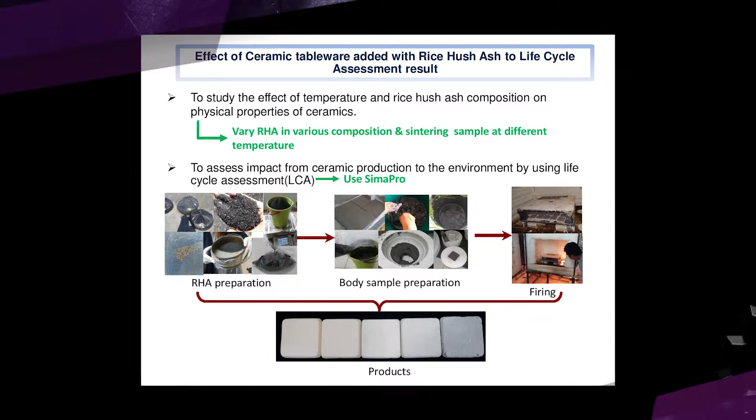Researching the effect of ceramic tableware added with rice husk ash, added to life cycle assessment, which uses an agricultural waste as a substitute material in the manufacturing process of the ceramic. Some papers say that it can improve some properties of the ceramic, like strength.

Every stage of the manufacturing process had a great impact on the environment. Therefore, life cycle assessment must be used to analyze and evaluate the impact of the product. To get the result, I have to do the experiment and create my own ceramic sample.

Firstly, I start by preparing the raw materials like clay and rice husk ash. In this research, rice husk ash was used in various compositions of 0, 5, 10, and 20% by weight. Ceramic samples were then treated at different temperatures of 800, 1000, 1100, and 1200 degrees Celsius.

Three properties considered were water absorption, firing shrinkage, and impact strength, because with different compositions and different temperatures, the results should show different data. For analysis and evaluation of the environmental impact, I employ the SimaPro application program to conduct the assessment.

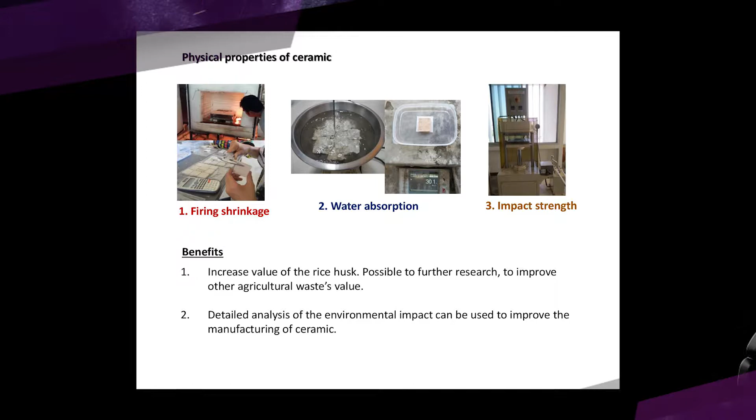The benefits of this research: it can increase the value of rice husk ash, and if we do further research, it can be improved for other agricultural waste, and detailed analysis of the environmental impact can be used to improve the manufacturing process of the ceramic.

Traditionally, we use wet washing method for biodiesel purification, but this method will cause wastewater and contamination. It also affects the environment. For this reason, we will change the wastewater method to an adsorption method by using resin.

So we will study biomass in Thailand, to develop the resin using biomass that is easy to find in the local area, and increase the value of waste peel.

Bioadsorbents were prepared from different peels for adsorption of potassium ion in biodiesel, and the potassium ion value was tested by conductivity meter. The adsorption performance of bioadsorbent was evaluated.

We evaluated potassium ion adsorption in biodiesel at different conditions such as shaking speed, shaking period, exposure time, and the amount of bioadsorbent. We made bioadsorbent from different types of peels: water hyacinth, cattail, and sedge.

From the experiment, we obtained the percentage of potassium absorption by bioadsorbent. The best condition: the first effect was shaking speed of 180 rounds per minute for the bioadsorbent.

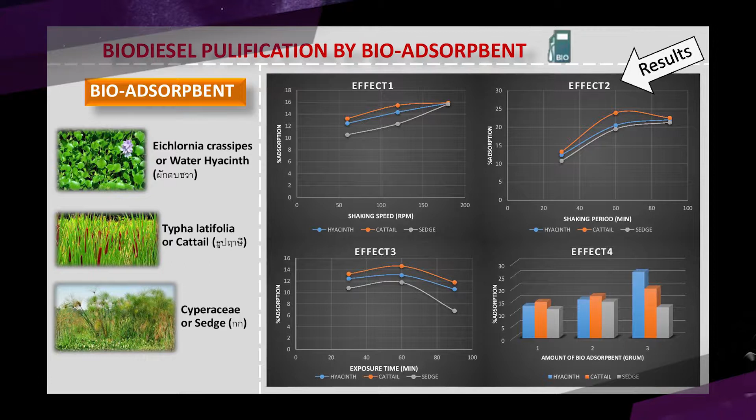For water hyacinth and sedge, we got a shaking period of 90 minutes, and 60 minutes for cattail. Then for exposure time, we got 60 minutes for all bioadsorbents. The last effect: for water hyacinth and cattail, we got an amount of bioadsorbent of 3 grams, and 2 grams for the sedge.

We think the bioadsorbent with highest efficiency is cattail.

Our project is natural rubber encapsulation by spray drying. Our goal is to create natural rubber powder for convenient use with natural polymer. To achieve this goal, we have 2 objectives.

First, to study the effect of encapsulant and spray drying conditions. Second, to study the effect of encapsulated natural rubber on polylactic acid and natural rubber blend. Our experiment can be separated into 3 parts.

First, feed solution preparation: this part mixes natural rubber with encapsulant and dilutes it with water. If the solution is too viscous, we have to decrease the solid content. And if the solution is not homogeneous, we have to add surfactant into it.

The second part is spray drying, where the solution will be turned into powder. If the powder gets stuck within the chamber of the spray dryer...

...we have to increase the air flow rate and air inlet temperature. On the other hand, if the nozzle is clogging, we have to decrease the air inlet temperature and feed inlet temperature. Our last part is testing.

We will test our product based on percent yield, moisture content, particle size, solubility in PLA, and toughness of the PLA mixture. For the result, the best feed...

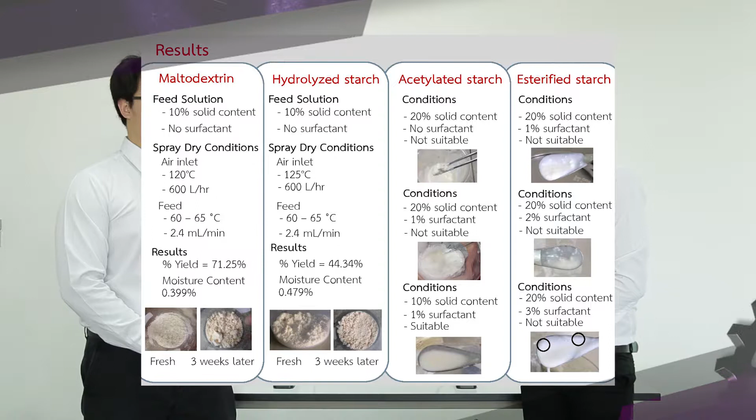...solution for maltodextrin is 10% solid content with no surfactant. Here is our spray dry condition. The result we get from maltodextrin is 71.25% yield with moisture content of 0.399%.

We tested the shelf life by leaving it for 3 weeks. It turned into a yellow color and the coagulate became large. However, if we break it, it's still in powder form.

For hydrolyzed starch, we used the same feed solution as maltodextrin, but changed the spray dry condition, with air inlet temperature to 125 degrees Celsius.

The result we get is lower percent yield with higher moisture content. We left it for 3 weeks and it turned yellow with a small coagulate, but smaller compared to maltodextrin.

For acetylated starch, we used 20% solid content with no surfactant. However, it remained heterogeneous, so we decided to add surfactant, and it formed a viscous liquid, so we decreased the percent solid content down to 10%.

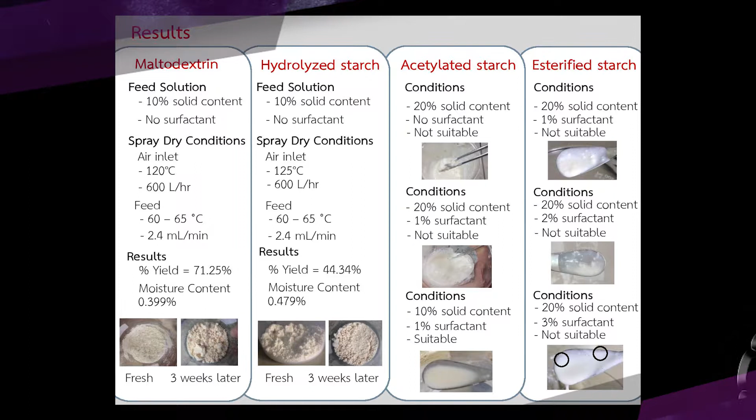However, for esterified starch, no matter how much we add surfactant, it's still in heterogeneous form, so we decided not to use it.

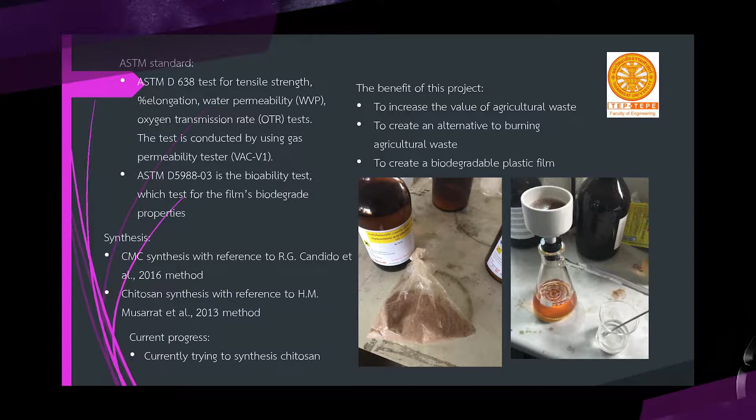Then the film is tested to ASTM standards, the American Society for Testing Materials. There are two objectives to this project. The first objective is to find the effects of chitosan on the composite film's mechanical properties. The second objective is to find the CMC-chitosan composition of the composite film with the least life cycle assessment impact on the environment.

The benefit of this project is to increase the agricultural waste value, and the second benefit is to create an alternative way to deal with agricultural waste other than burning it.

Good morning. Our project is a thermochromic study of FriXion ink in thin film form. A thermochromic system is a system that has the ability to change its color forward and backward due to variation of temperature. In this study, we use FriXion Point erasable ink from Pilot Company.

The colors are black, blue, and red. We apply the ink solution into 3 different types of polymers and cast it into thin film form. Those 3 polymers are natural rubber, polyethylene glycol, and polyvinyl alcohol.

Our study was separated into two parts. In part 1, we studied the reversibility of the thermochromic system by heating up the films at a constant heat rate and recording the temperature of the films and the water inside.

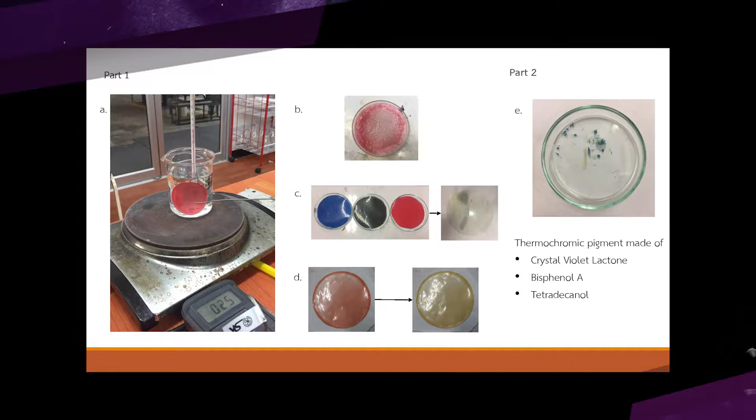So it can be concluded that heating rate is the factor that affects the reversibility of the thermochromic system. For each type of polymer, it has a different limit of heating rate due to the difference in thermal conductivity.

In part 2, we synthesized the thermochromic pigment by using crystal violet lactone as a color former, bisphenol A as a developer, and tetradecanol as a co-solvent. So far, we succeeded in synthesizing the thermochromic pigment, and we are working on turning it into liquid phase so it can be applied with various applications.

Today we present about modification of cellulose acetate and polyamide membrane for desalination. Desalination can be defined as any process that removes salt from water. In Thailand, this process is important for areas that are islands.

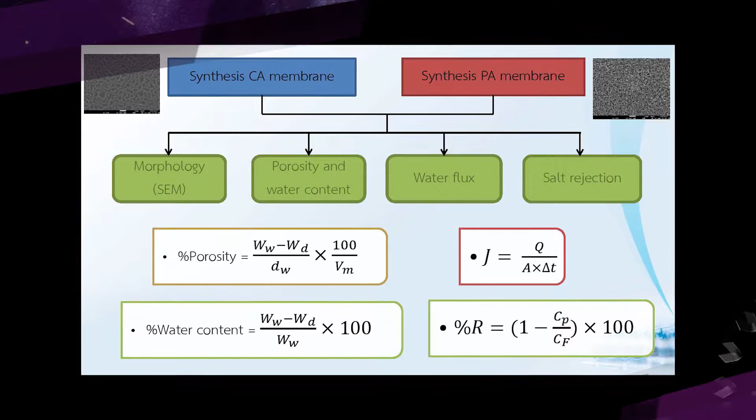We separate into two parts. The first one is synthesis and modification of the cellulose acetate membrane, and the second one is synthesis and modification of the polyamide membrane.

Then we will find out the morphology by using scanning electron microscopy. Next, we will find out porosity and water content, then water flux, and the last one is salt rejection.

Finally, we will compare which one is better between cellulose acetate and polyamide membrane. And we heard that when we add more polyethylene glycol, the characteristic, which one is better, and the water flux and salt rejection will increase.

Our project is the drying of moist municipal solid waste using microwave irradiation. Usually the moist municipal solid waste contains a high amount of water inside, making its disposal via incineration inefficient. We need to use microwave irradiation to remove the moisture content before disposal.

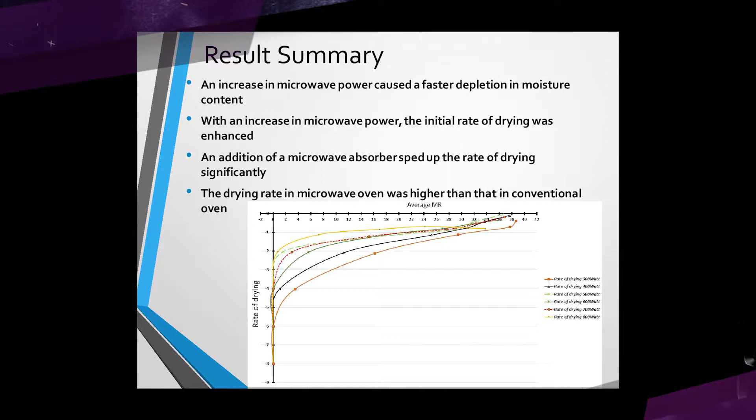So the result summary is that our microwave drying is faster than conventional drying. Also, as the microwave power increases, the drying becomes faster. And after we increase the initial moisture content, the drying time increases. This is the result from the project we have already done.

Our research topic is biomass gasification with PEM fuel cell. The continuing expansion of world population leads to a growing demand for energy, and the rapid growth raises concerns about global warming caused by fossil fuel. Therefore, biomass is one of the potential alternatives to fossil fuel due to its beneficial properties. So biomass is converted into hydrogen by the use of gasification, and the hydrogen is further converted into electricity by the use of a fuel cell.

A fuel cell is a potential electricity system since it can be integrated into many applications. Moreover, the extra energy left from cooling down the temperature from the gasifier into the fuel cell can be converted into electricity by the use of a steam turbine. This study aims to investigate the characteristics of biomass gasification integrated with a PEM fuel cell by simulating the process. The process is accomplished through the ASPEN program in order to propose an alternative solution for the production of electricity.

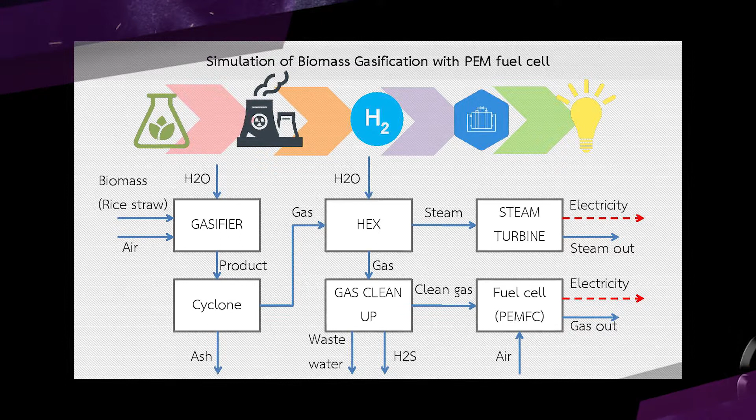The biomass is fed into the gasifier to produce hydrogen. The hydrogen is further sent to the PEM fuel cell to produce electricity. From the result, as the temperature of the gasifier is varied from 400 to 1000 degrees Celsius, the hydrogen output rises until it reaches 600 degrees Celsius, giving the highest amount of hydrogen. Therefore, the best temperature of the gasifier is 600 degrees Celsius for every biomass feed rate.

For the PEM fuel cell part, we set the power output from 1 to 5 kilowatts and operated it at 3 different conditions. First, at 80 degrees Celsius, 1 ATM, and 0% RH. Second, at 100 degrees Celsius, 58% RH, 2 ATM. And lastly, at 120 degrees Celsius, 3 ATM, and 100% RH.

As we can see from the graph, as we increase the operating conditions, the amount of hydrogen required decreases. Therefore, the best condition, or the condition that requires the lowest amount of hydrogen, is at 120 degrees Celsius, 3 ATM, and 100% RH.

Thank you for listening. Today we are going to present our project on release of sodium salicylate from starch-based hydrogel. We synthesized the hydrogel starting with wheat or arrowroot starch, then mixed it with a cross-linking agent such as borax and glutaraldehyde, or mixed the drug first with the sodium salicylate. Then we synthesized the drug-loaded hydrogel and studied the release kinetics of the starch-based hydrogel and its absorbency.

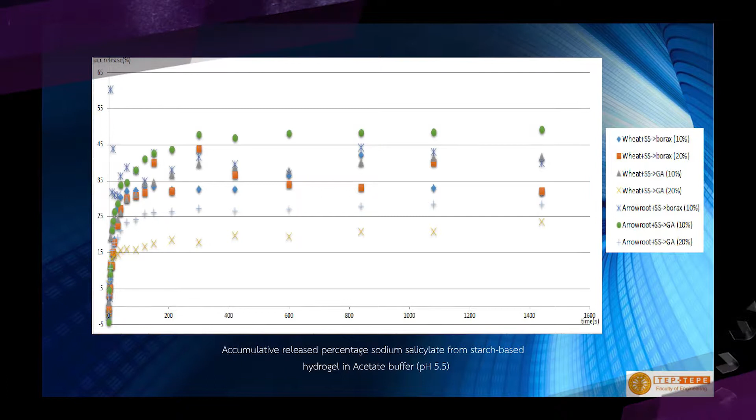This graph shows the accumulated release percentage of sodium salicylate from starch-based hydrogel in acetate buffer pH 5.5. You can see from the graph that arrowroot starch mixed with sodium salicylate and 10% glutaraldehyde gives the highest accumulated release percentage of sodium salicylate. The second one is wheat with sodium salicylate mixed with 10% glutaraldehyde.

You can see from the graph that overall, arrowroot gives a higher accumulative release percentage of sodium salicylate from starch-based hydrogel, with wheat being the second. The cross-linking agent glutaraldehyde gives a higher accumulative release percentage of sodium salicylate from starch-based hydrogel.

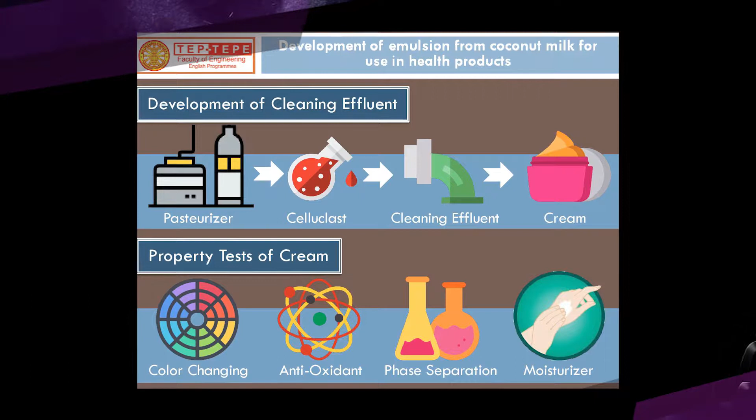Then we discovered that the effluent from enzymatic cleaning has an emulsion property, so coconut oil cannot be separated from the cleaning emulsion. So we apply this enzyme, which we call Celluclast, to develop an emulsion for health products without emulsifier addition. Finally, cream tests such as antioxidant test, stability test, and moisture retention on skin are studied in my project.

Our project topic is the application of a crack detection system in the finite element modeling of cracked concrete structures. I'm going to start with the statement of the problem. Nowadays, many buildings and infrastructures collapse from structural failure. The easiest way to observe structural failure is by the cracks in our building. Therefore, we try to create 3D models with cracks to inspect the strength capacity of the building beforehand, to reduce the risk of collapse in the future.

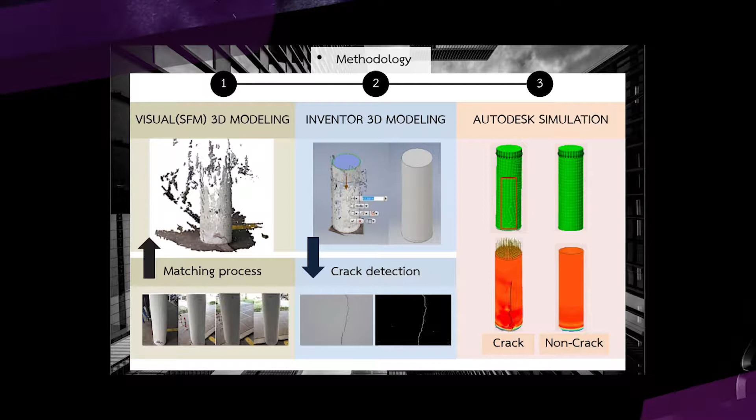To see the total progress in our project, we will go to the methodology, which is divided into 3 parts. The first part is constructing the 3D structure using the VisualSFM application. Before we construct the 3D structure, we have to collect the data set. We photograph the structure from all directions, which becomes a series of images, and then we put the series of images into VisualSFM. This application will create a 3D structure.

After we create the 3D structure, we go to the second step: constructing a 3D solid shape using Autodesk Inventor. Autodesk Inventor converts the 3D structure from the previous step into a 3D solid shape, as real as possible to the original model. Then we try to put the crack detection system into the 3D model. However, because of the limitation of today's technology, we cannot put the crack into the 3D model, so we changed the way, putting the crack in by hand instead of with the crack detection system. After we put the crack manually in the model, we go to the final step.

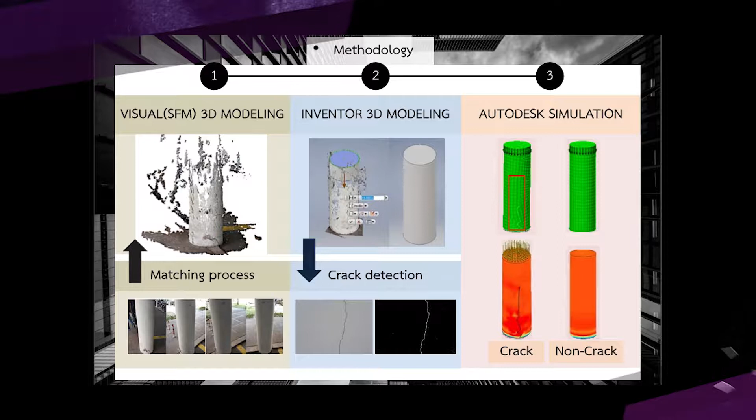The final step is 3D finite element modeling of crack and non-crack structures using the Autodesk Simulation application. This application will analyze displacement, stress, and strain of crack and non-crack structures. After we analyze the stress values, we compare crack and non-crack structures to prove that the cracked structure model has a lower strength capacity than the non-cracked structure. That means the cracked structure has a higher risk of collapse in the future.

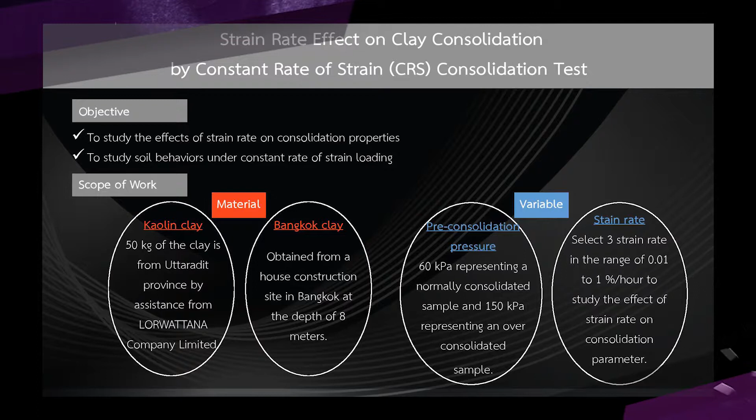For the variables, we decided to study two. The first is the pre-consolidation pressure, varied into two values: 60 kilopascals, representing a normally consolidated clay, and 150 kilopascals, representing an overconsolidated clay. The second variable is the strain rate, varied into three rates: 0.01, 0.5, and 1% per hour.

The methodology for our project can roughly be divided into 4 steps. The first step is to prepare the sample in a 6-inch diameter mold with applied pre-consolidation pressure. The second step is to connect all the devices together, the electronics and the water tubing connections.

The third is to test our subject, which could be subdivided into 2 more steps, which are the saturation step and the consolidation step. And lastly, when we gather all our results, we could analyze and evaluate our results and make a discussion and conclusion.

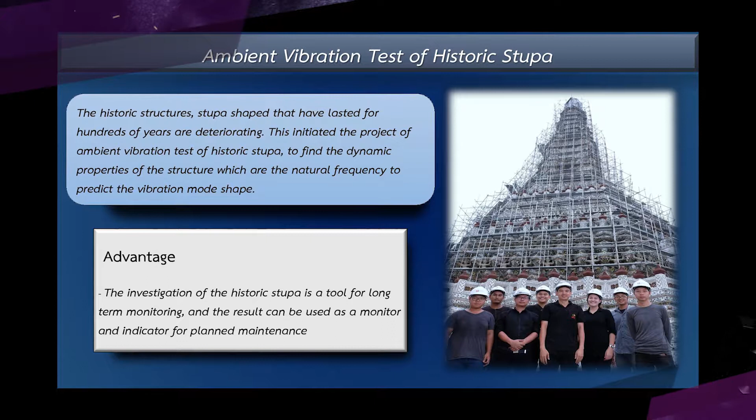The project is ambient vibration test of historic stupa. We consider the historic structures, which are the stupa shape that have lasted for hundreds of years. They are deteriorating, meaning some of them are cracked, tilted, or falling down. Everything is decayed over time, and deterioration is caused by humans themselves and natural events. So if no one has done any research and studies for these historic structures, they will have no evidence for maintenance or any restorations.

So this requires the knowledge of civil engineering studies. This initiated the project of ambient vibration test of historic stupa to find out the dynamic properties of the stupa, which are the natural frequencies, and predict the vibration mode shape. Our main investigation is the central stupa in Wat Arun Rachawararam, Rachawara Mahavihar.

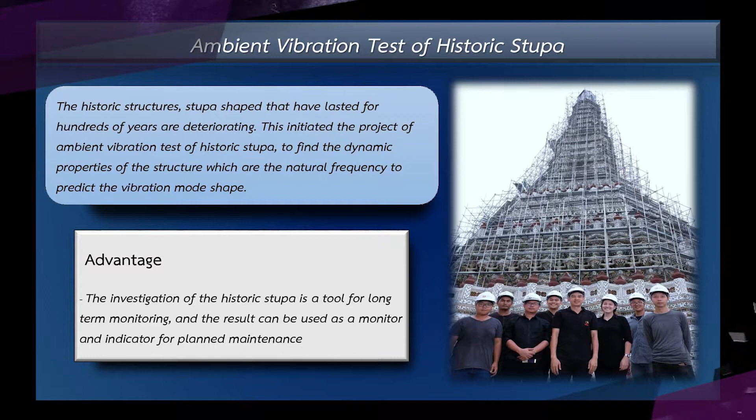For the work procedure, we set up the equipment on top of the stupa, which are the data acquisition system and the microtremor sensor. It records the data in amplitude in time domain. Then we convert it by fast Fourier transform to be the frequency domain. The result shows natural frequencies are likely 3 modes. For the peak one, then we show the vibration mode shape of each stupa.

The results show the vibration mode shape in each direction, which are 3 modes. So this result is useful as a benchmark for the present and compared to any change in the future. This is an indicator and monitoring for planned maintenance. Thank you.

Our research topic is an investigation into construction waste and their root causes. These days, the construction industry in Thailand is growing rapidly. The unavoidable following result is waste. Construction waste in Thailand is a big portion in Bangkok. If we can reduce the construction waste, the waste will be reduced in a huge amount.

Our objective is to determine the major type of waste and investigate their root cause in order to set the measure to minimize them. Our research can save the resources and let the contractor earn more profit and save their cost of production. The construction area and nearby area will become cleaner.

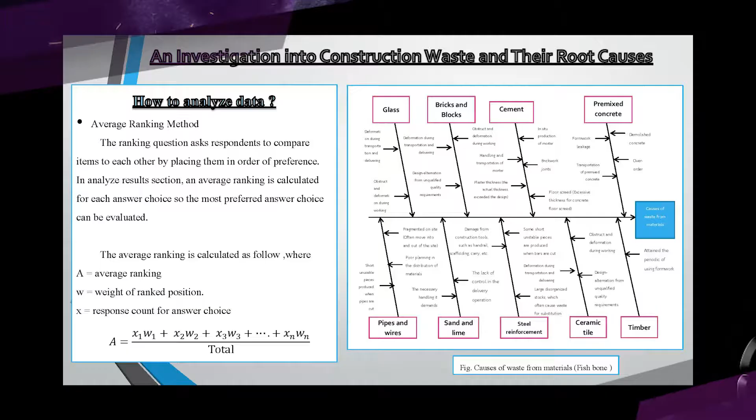As we know, construction waste has been considered as a major problem in the construction industry. We consider that this is the most common problem that we found normally on the construction site. Therefore, we set the minimization to reduce this waste and to control the waste generated from the construction. So, after all, we went through all the research from the past.

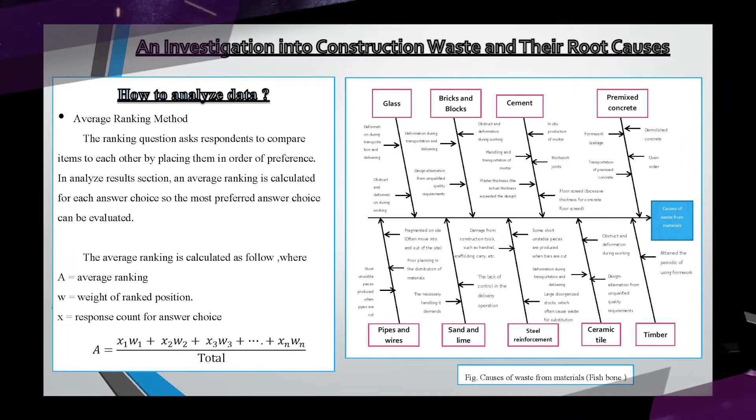We gather the data from this research and make a fishbone to show and illustrate the construction waste in three types. The first one is construction activity that we can also separate further into handling, procurement, design, and operation. The other one is the fishbone from the construction waste from material that we can separate to many types of construction materials such as cement, brick, ceramic tile, or any pre-mixed concrete that we generally found on the construction site.

Therefore, after we gather all this data, we design a questionnaire to hand out to all the professional engineers on the construction site to answer. We will use the ranking method to rank this construction material and construction waste from the most to the least. By using this method, we will know which construction waste will come the most and which one will come the least.

After all, we conclude all the data. We will set the minimization for the construction waste, how to reduce all of them, by making another fishbone to illustrate how to set this construction waste. After we gather our three fishbones, we will conclude all the data, and then we will use it and publish it to the public. Thank you.

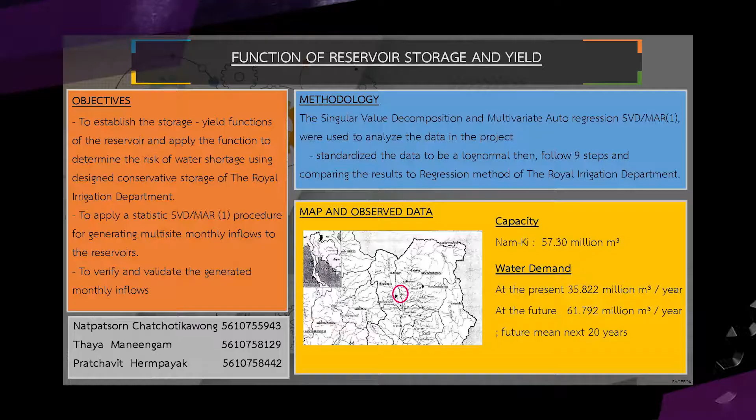Our project is the function of reservoir storage and yield. The purpose of this project is to determine the risk of water shortage using the design conservative storage of the Royal Irrigation Department. Second, to apply the statistics SVD and MAR1 to consider the generated multi-site monthly inflows, and the last, to verify and validate the generated monthly inflows.

The methodology that we use is the singular value decomposition and multivariate auto-regression method. To standardize the data to log normal and then follow the 9 steps, comparing the result with the Royal Irrigation Department.

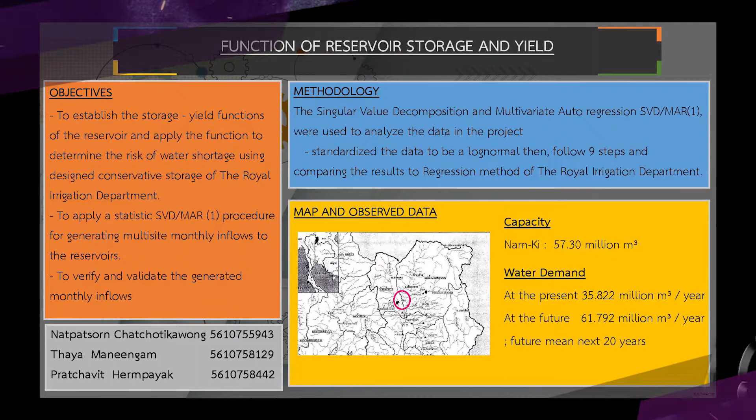The reservoir that we concern is Nam Ki Reservoir. Nam Ki Reservoir is located at Nan, Thailand, and the capacity of this reservoir is 57.3 million cubic meters, and the water demand at the present is 35.82 million cubic meters per year.

From the results of this project, we know that reservoir construction is not needed at present, because nowadays the water demand at Nam Ki Reservoir is just only 35.822 at the present, and for the next 20 years it's just 61.792 million cubic meters per year. But this graph shows that the water demand that needs reservoir construction is above 430 million cubic meters per year.

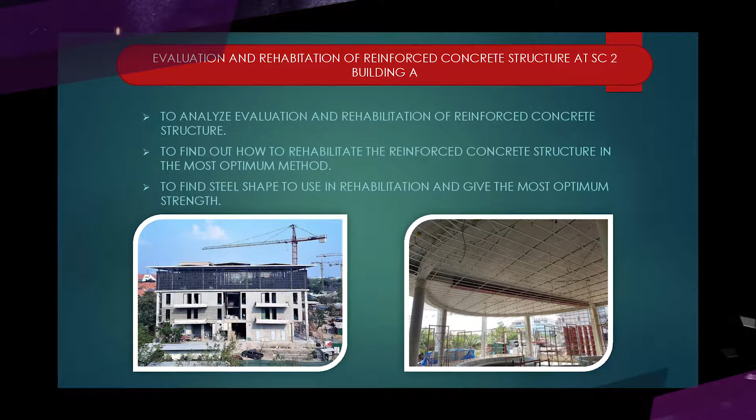Today I'm going to present about evaluation and rehabilitation of reinforced concrete structure at case study SC2 Building A. This building has some problem about under design of the reinforced concrete structure, because when the designer designed this building, they designed the cross section of some beams and columns too small, and some deflection occurred when the construction started. And the main point of our project is rehabilitation of the beam named PL2B8,

which has a problem of cracks occurring because the bending moment is overloaded. This problem occurs when we do not apply any live load. So the deflection of it is more than 5 centimeters and does not pass the ACI standard. So we have to find some way to repair it.

And the method we use to analyze the structure of this building is the finite element method. We used some computer programs to analyze the structure because nowadays we have many programs which can use the finite element method to analyze the structure, and it's easier than calculating by hand.

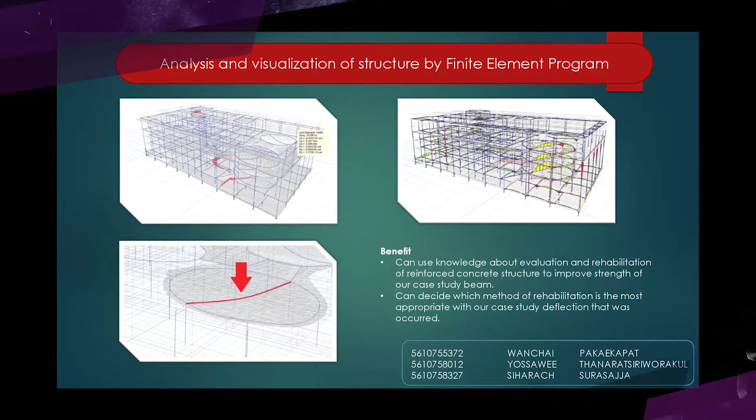And this is some drawing from our programs. It is a 3D drawing program and it can analyze all the information about the structure, like bending moment diagram, shear force diagram, and show all the deflection from load, and can tell us whether the structure can be used in the future or not.

And the result tells us the deflection occurs and it's like in the real situation, because the deflection from the programs is around 5 to 10 centimeters. So we have to add more external reinforcement to repair it.

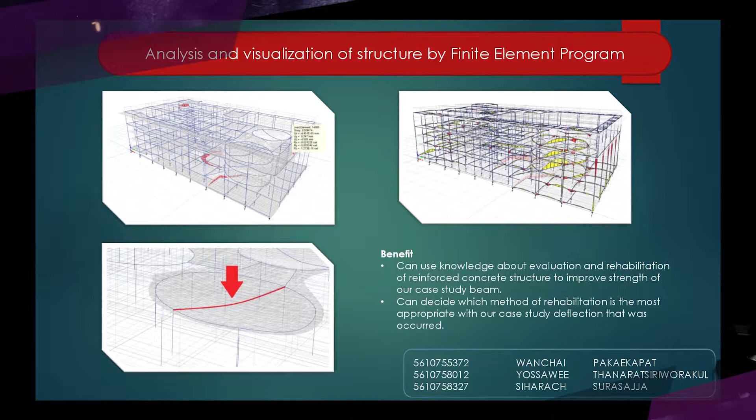So, the result is when we repair the beam, PL2B8 beam, deflection is less than the standard. So we can conclude that our rehabilitation method is good enough to use in the real situation. So this is all about our project.

Thank you. The project is about assessments of defects in high-rise condominiums. Nowadays, there are a lot of people who prefer to live in high-rise condominiums within the city centers more than a single house that is far away. So there are many construction projects in the city center, especially high-rise condominiums. And defects are the main factor that affects the whole construction project.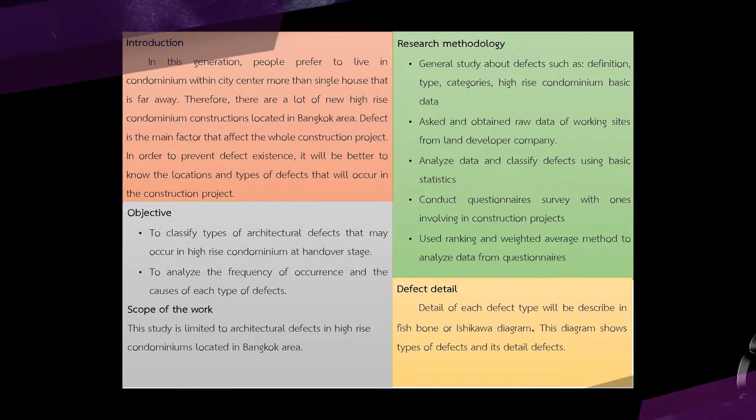Therefore, it will be better to know the location and type of defects to prevent defects in construction projects. The objective of this study is to classify types of architectural defects at handover stage in high-rise condominiums and to analyze the frequencies of occurrence and the causes of the types of defects. The study is limited to architectural defects in high-rise condominiums at handover stage within Bangkok area. Research methodologies divide into 6 main steps.

The first one is general studies about defects, such as definitions, types, and categories. The second is asking raw data from land developer companies. Third, classify and analyze the defect types using basic statistics. Fourth, conduct a questionnaire survey with those involved in construction projects.

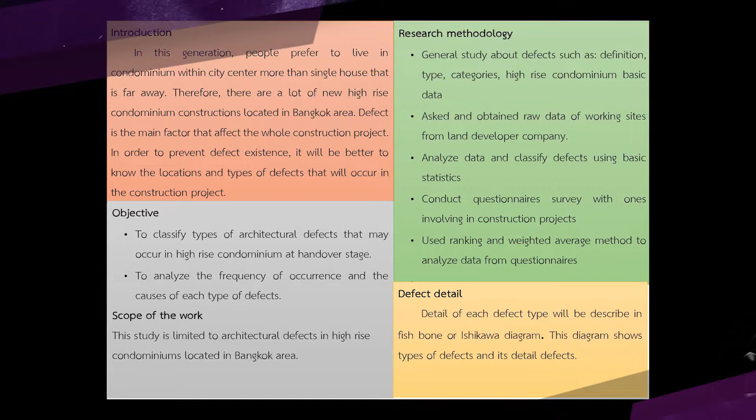Fifth is to analyze the questionnaire survey using ranking method followed by weighted average method to find the real result of the survey. And the last step is to make conclusions and compare the 2 types of data that we got from the land developer companies and from the survey itself. The details of the defects will be shown in a fishbone diagram or Ishikawa diagram, and I will show it later.

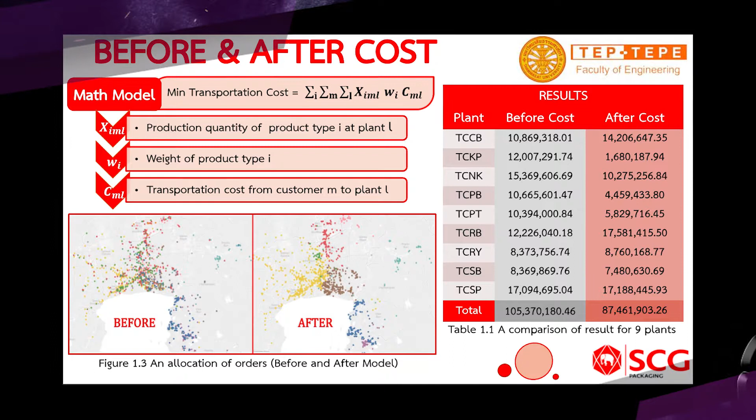Here shows a comparison of delivering costs before and after using our math model. The tables indicate that we can reduce the cost from 105 million baht to 87 million baht, which is around 17% of the cost. And the maps show an allocation of order for the customer, which groups the customer into the zone that the nearest plant is located. It helps the company to deliver the product easier.

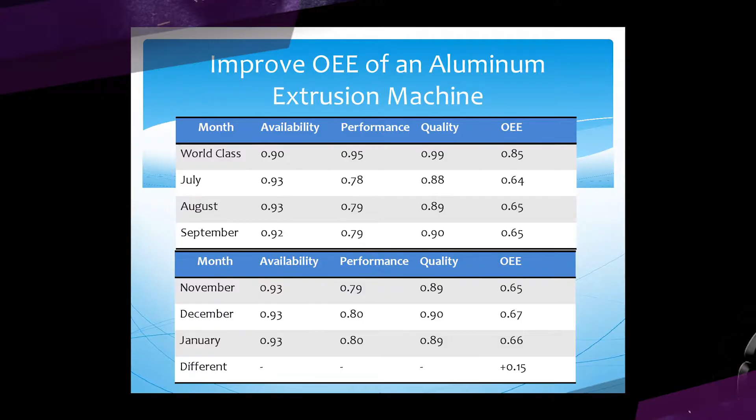The availability here is the base, and we've gone over the availability of the world class. But performance and quality, we are just under them. So we have improvement on these 2. And again, the conclusion is a success of 0.15%. And that's our project. Thank you.

Our project is called Orders Co-Planning and Scheduling for Packaging Factories. SCG Packaging is one of SCG's main business units. It is one of the largest manufacturers of corrugated containers in Southeast Asia. And the objective for our project is to develop the methodology for co-planning and improve order allocation for both plants by minimizing the total cost.

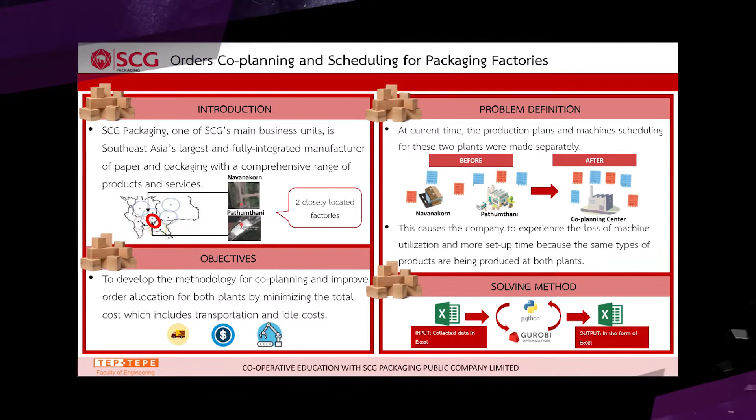And for the problem that we found, at current time, the production planning is made separately since each plant receives the order by itself and schedules the machines by themselves as well. So we will solve this by collecting the data in the form of Excel and then putting it in Python and solving by Gurobi optimization software, and then the output will be in the form of Excel as well.

Next, we are going to discuss our mathematical model. Our aim is to reduce the setup cost, manufacturing cost, and also transportation cost. We also have 6 constraints to limit the production, including demand, machine capacity, paper width, flute, board combination, and also production limit per period.

As you can see from the pie chart, firstly, Pathum Thani has production accounting for 50%, but Navanakorn has only 36%. And both of them can produce the same products, about 14%. And after we use our mathematical model, their production units are shared equally.

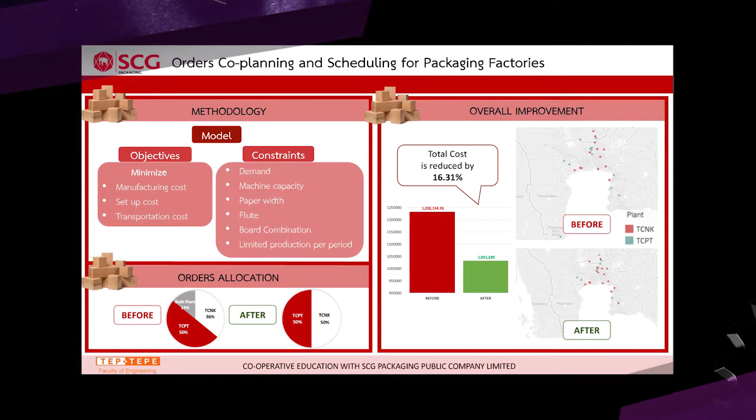And this is the overall improvement. We can reduce the total cost by about 16.31%. And some of the products from Pathum Thani are shared to Navanakorn because Navanakorn has higher machine capacity.

So our project is a stand-up desk. Our objective is to create a stand-up desk that reduces the ergonomic problem for people who sit in front of a computer screen for long periods, and also adapts to install in the real existing workplace. Our stand-up desk uses the mechanic lifting system and adjusts according to sitting and standing height for the correct posture of each individual. Furthermore, it differentiates from existing stand-up desk manufacturers by reducing the cost, maintaining the quality, and being designed to suit the Thai office worker.

So the advantages of the stand-up desk are: first, increase the heart rate. Second, impact the metabolic risk factors. Third, reduce obesity and weight gain. Number 4, increase work performance. And number 5, reduce several diseases.

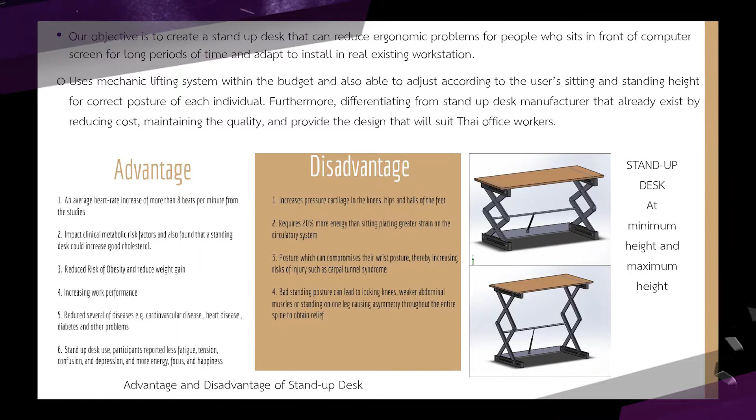So next are the disadvantages of the stand-up desk. First is increased pressure on the knee. Second, it requires 20% more energy. Number 3, increased risk of injury, such as carpal tunnel syndrome. And the last is if you don't have the best posture for standing, it can lead to injury too. And next is the mechanism of the standing desk.

Okay, so for the lifting mechanism of our standing desk, we use what we call the scissor lift, which is the orientation of a single and a double X bar in an X pattern. This allows us to use a shorter gas spring, which means we can reduce more cost.

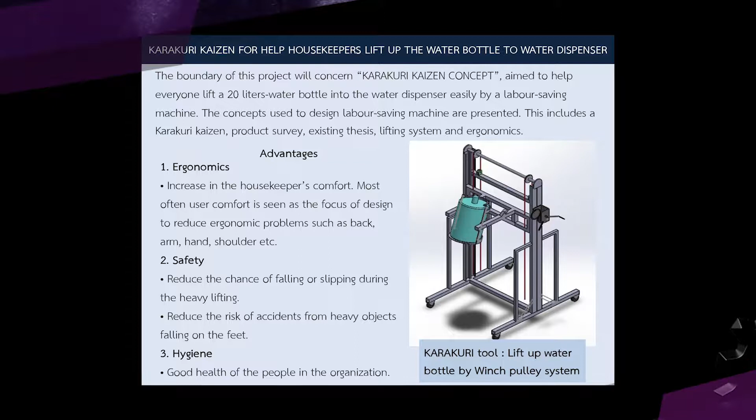This project is about Karakuri Kaizen to help housekeepers lift the water bottle to the water dispenser. According to the problem found at the engineering faculty, the housekeeper has to lift a 20 liter water bottle to the water dispenser at least twice a day, so the housekeeper gets back pain. That brought us to the idea to make a machine to help the housekeeper lift up the water bottle into the water dispenser, which was based on the concept of Karakuri.

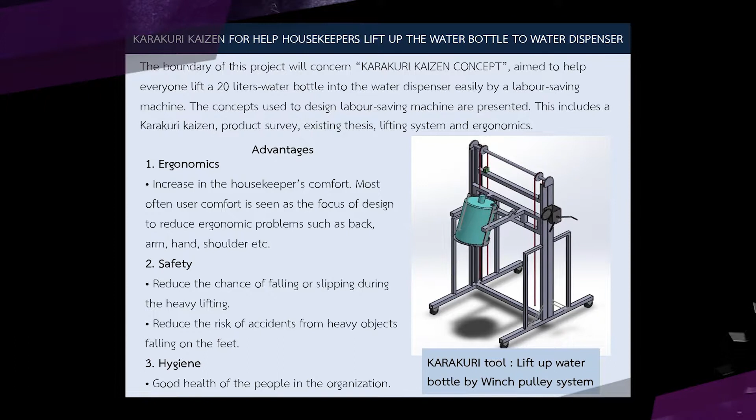Karakuri is something that uses simple mechanics, mainly non-electric and non-powered machines like wheels, gears and pulleys. So our primary objective of this project is to reduce the ergonomic problem and also improve safety and hygiene. After we collected data such as the inspection of the water bottle and water dispenser and the change frequency, we analyzed the problem in deep detail with the NIOSH lift equation and lever, and we designed the machine with drawings in SolidWorks, and we got the final prototype.

After all, we got the machine, which is made of steel and uses the pulley system as the main idea, with no electricity required in this system. So the work procedure is the housekeeper has to cut the seal, bring the water bottle into the water bottle frame, and then cover the water bottle mouth with a plastic wrap. After that we lift the water bottle with the pulley system.

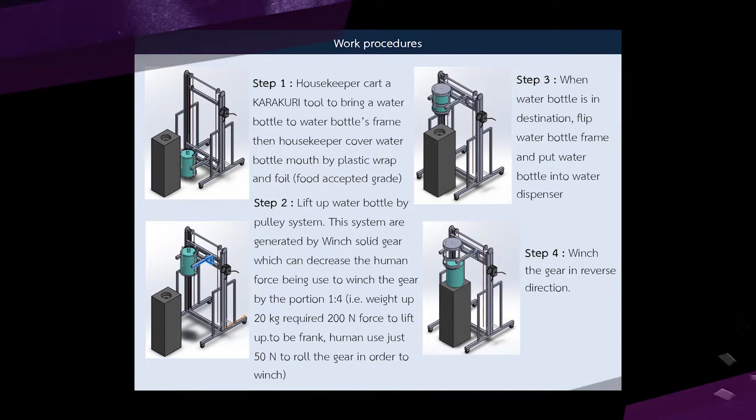This system is driven by winding the gear, which decreases the human force needed to wind the gear. And when the water bottle is at its destination, we flip the frame and bring the water bottle to the water dispenser, and after that wind the gear in the reverse direction.

Today, I would like to present about solutions for sustainable waste management. Nowadays, toxins are produced in the landfill of waste material, leachate and greenhouse gas, which can create global warming.

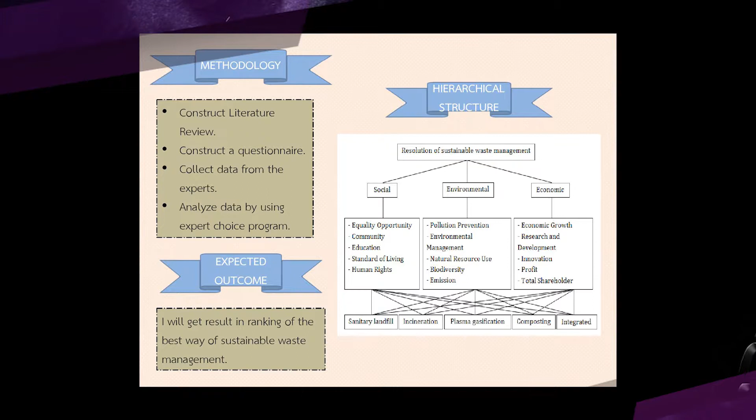Sustainable waste management is a very important issue for everyone in the world to consider and find ways out. The objective of this study is to investigate sustainable waste management approach by adopting the concept of triple bottom line. This work uses 5 main methods of waste management: sanitary landfill, incineration, plasma gasification, composting, and integrated waste management. For methodology, we first conduct a literature review, then conduct a set of questionnaires and collect data from experts, and lastly analyze data using the expert choice program.

This diagram shows the relationship of goal, criteria, sub-criteria, and alternative. The goal is resolution of sustainable waste management. The criteria are social, environmental, and economic. The sub-criteria are 15 indicators, and the alternatives are the 5 methods.

For the results, I used the expert choice program to analyze data and found that the best alternative in the viewpoint of experts is the integrated waste management method, as reflected by its score. Thank you for your attention.

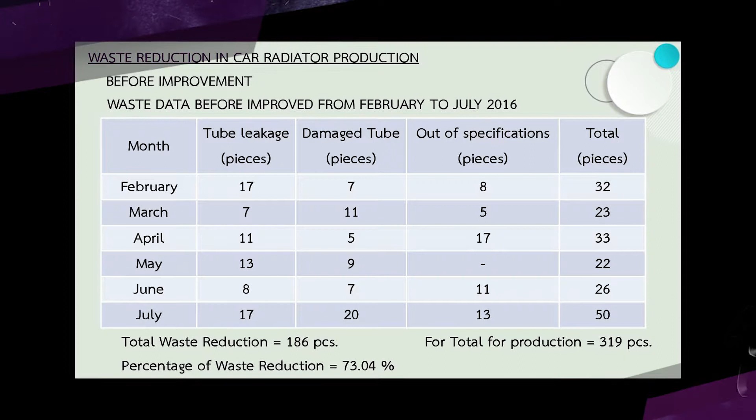To start with, I will describe the process we made this year, then mention some of the problems we encountered and how we overcame them. This is the data of defects in car radiator production, which is about 73% overall. The intention of this project is to reduce the waste product by applying knowledge of industrial engineering such as quality control tools, cause and effect diagrams, and other knowledge related to the manufacturing process.

There are three main types of defects we encountered in this case study: tube leakage, damaged tube, and out-of-specification products. We addressed these by studying and analyzing the products to find solutions, studying the causes, analyzing the defects, and using waste data. Here is the result of the improvement.

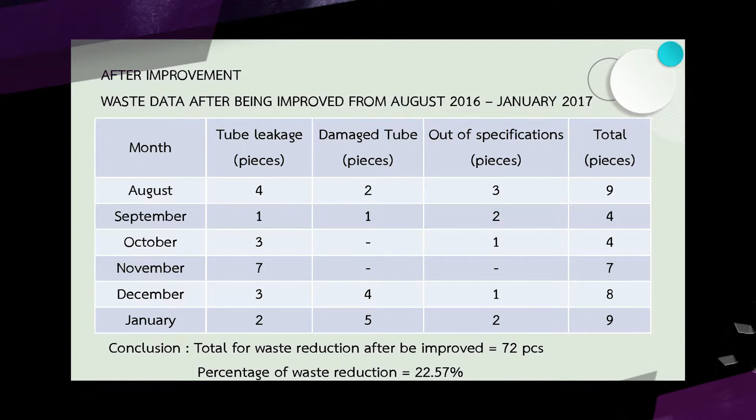Each defect has been improved in order to minimize the chance of the product defect. Finally, after implementing techniques and theory in our case study, we found that the waste proportion was reduced to 22%, and the outcome is remarkably satisfactory to our associated company. Thank you for your attention. If you have any questions, you are welcome to discuss anytime.

Thank you very much. Our group will present mechanical property and degradation of polybutylene succinate blend with thermoplastic starch. The objective of our group is to reduce the cost and improve the performance of the material, and also study the mechanical property and degradation of the polymer blend.

First, we start the experiment by preparing thermoplastic starch by blending cassava starch with glycerol using a high-speed mixer for 10 minutes. Next is the preparation of PBS and TPS blend. We blend with different ratios of PBS and TPS: 100/0, 80/20, 60/40, 40/60, 20/80, and 0/100. Then we blend PBS and TPS with a twin screw extruder and cut into cylindrical pellets.

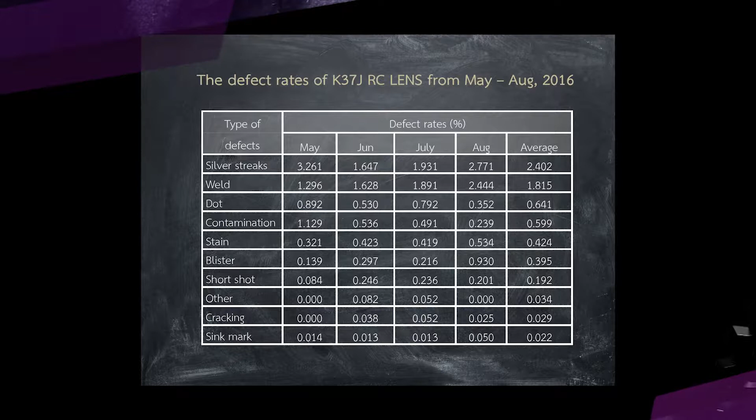This analysis identified the first 4 defects: silver streaks, weld dot, and contaminations. We then used cause and effect analysis to analyze the potential causes of the defects, and found that silver streaks occur from the hopper dryer. Specifically, the problem was that the edge of the hopper dryer was old, allowing moisture into the dryer, and the filter inside was also broken, so the preheating process could not be done properly. So we decided to change the hopper dryer from the old one to a new one.

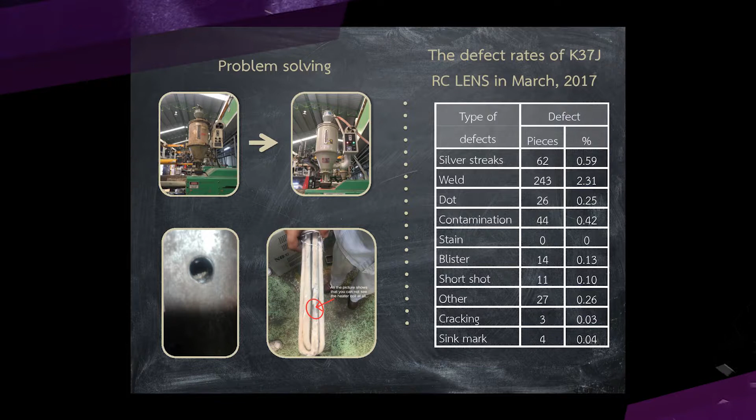For weld, it was found that the cause is from water. Water used inside the factory is a mixture of groundwater and tap water which contains dirt, and it blocks the hole, which affects the mold temperature, causing weld. The solution is to renovate the water system, but it could not be done recently because our production line has to completely stop in order to change it.

After the improvement, the defect rate of K37J RC lens in March 2017 shows that the defect rate of silver streak decreased from 2.42% to 0.59%, while dot and contamination reduced to 0.25% and 0.42%. However, weld increased to 2.31% because the problem of the water system has not been solved yet.

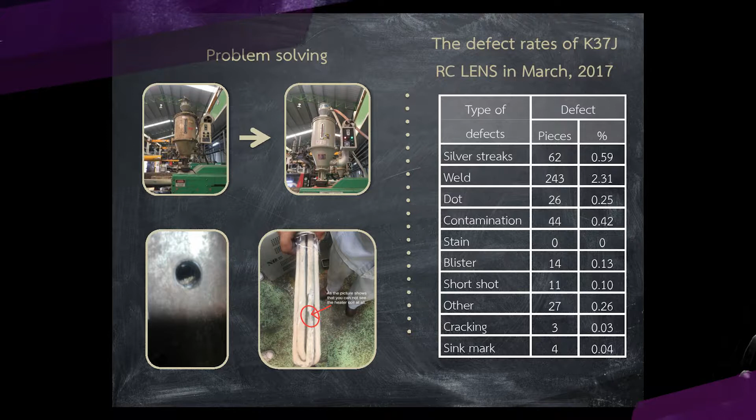The overall defect rate of 2016, which is 12.21%, was reduced to 4.53%, which is lower than the yield target of 5%.

CNC milling is a machine process using a rotary cutter to remove material from a workpiece by feeding in a direction at an angle with the axis of the tool. It covers a wide variety of different operations and machines, scaling from small individual parts to large heavy-duty gang milling operations. It is one of the most commonly used processes in the industry and machine shops today for machining parts to precise size and shape.

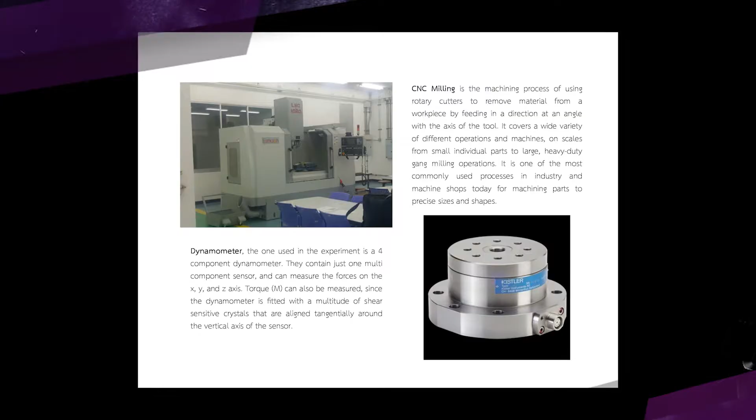The dynamometer used in the experiment is a 4-component dynamometer, which includes X, Y, and Z axis force. The dynamometer can also measure torque, since it is fitted with a multitude of shear-sensitive crystals. Our objective for this study is to experiment and compare the efficiency of two drills: the HSS normal drill and the indexable drill with a removable tip.

We will use two cutting speeds to differentiate the tests, and also use cooling and non-cooling with oil and water. For the methodology, we consider the results of cutting speed and force using the dynamometer. We gain data from that and plot it into a graph, and we can also look at the surface wear of both the workpiece and the drill.

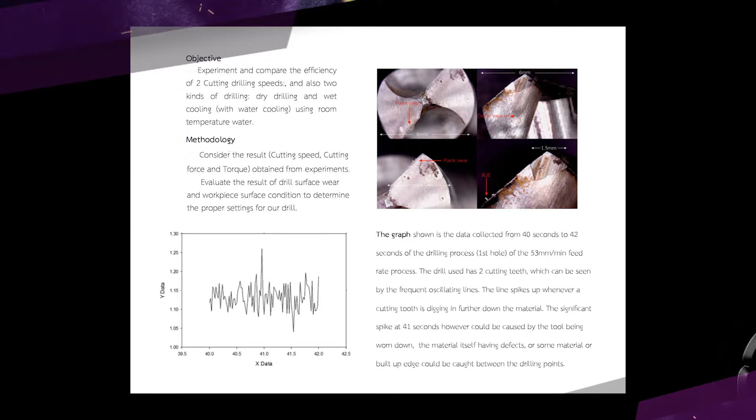The graph shown here is from the process of drilling. It's only a part of the process, not the whole drilling process, but we magnified it so it's easier to see. If you can see the spikes up and down oscillating from top to bottom, that's when the tooth of the drill hits the workpiece and tries to cut down the material. And if you see the big spike up in the middle, that means there might be some kind of built-up edge or wear or shearing going on, which might cause that spike.

So basically our study is about CNC milling machines, drilling, the efficiencies of the drills, and also studying and using the dynamometer.

I am working on a step converter. The step converter is a buck-boost converter; they can step up and step down voltage from a power supply. Nowadays we have many types of devices using many different voltages, so we have to make a converter to convert, because sometimes we have only one power supply. The step converter I will use is wireless, controlled using a microcontroller produced from Arduino.

This is the component that I use. The expected outcome is to control voltage, adjustable and usable by Android on a mobile phone. Yeah, just like that.

Today I'm going to present an analysis of stock market tendency by applying neural networks. Our problem statement is that nowadays most people's income is not high enough compared to their expenses, so a second or third source of income is needed. One of the best choices is to invest in the stock market because it is very profitable. Many have tried, but not so many of them have succeeded because they don't know when to buy, hold, or sell their shares.

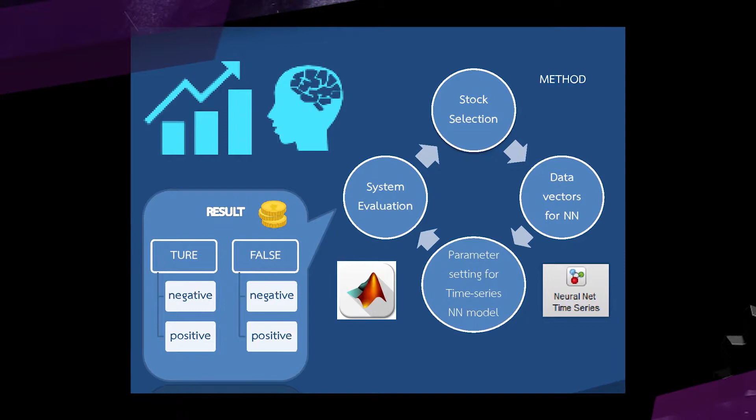When we select the stock, we choose that the close value and volume, when multiplied together, must exceed 100 million. Then we convert all the information we have in the Excel form to a vector in MATLAB, to be able to have them as input in the artificial neural network model in the MATLAB program.

We adjust the percent of training, validation, and testing, along with the number of hidden neural network layers and the delay. After that, all the information we have gained as the outcome is calculated again and converted into a percentage of accuracy. We then compare what kind of input and target has the most efficiency.

Our result will be in the form of percentage of accuracy, divided into true negative, positive, and false negative, positive. True means the prediction is correct, and false means the prediction is incorrect.

Age-related macular degeneration, or AMD, is one of the eye diseases related to age. People with higher age will have a higher risk of AMD. 1 in 10 people in Asia has become an AMD patient, and it is expected to increase in several years.

Many places in rural areas face the problem of lack of ophthalmologists, which increases the risk of AMD. So we have created an automated screening system to screen AMD patients faster, reducing the risk of people losing eyesight.

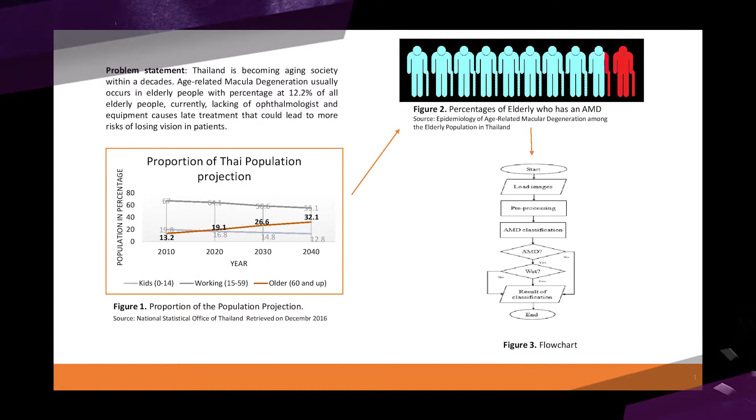classification of AMD against normal and other disease. Moreover, 95% in classification between dry type of AMD and wet type.

Currently, we are moving on to deep neural network, which performs better in classification, and we aim to increase our algorithm's capability as much as possible, and try to extend the range of quality images used, to generalize our algorithm.

Hello everyone. We are working on the prototyping of software for the teleoperated vehicle project. Our objective is to learn about the model-based development process and tools for automotive software development by using MATLAB and Simulink.

Here is the system overview. The driver will give input to the Momo racing wheel, and the data will be sent to the Freedom board, passing through the Raspberry Pi. The Freedom board acts like a car ECU, ordering the front and rear wheels to move.

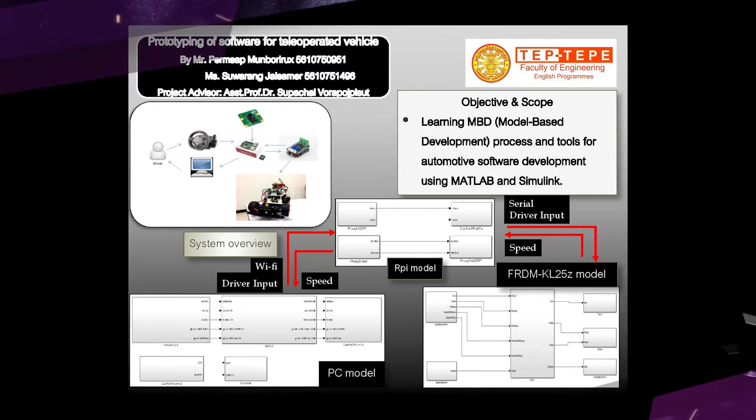The Raspberry Pi will receive live feed video from the RPi camera and the speed of the car, and show it on the screen control. Our software structure can be separated into three parts: the PC model, the RPi model, and the FRDM KL25Z model.

The first one, the PC model, will bring the driver input to be processed in the ADAS block, which handles red light detection and can be turned on and off manually. Later, all the data will be sent into the RPi model.

In this block, it will transfer all the data into the FRDM via serial port. In the FRDM model, this acts like an ECU of the car, processing the operation of speed and direction of the car.

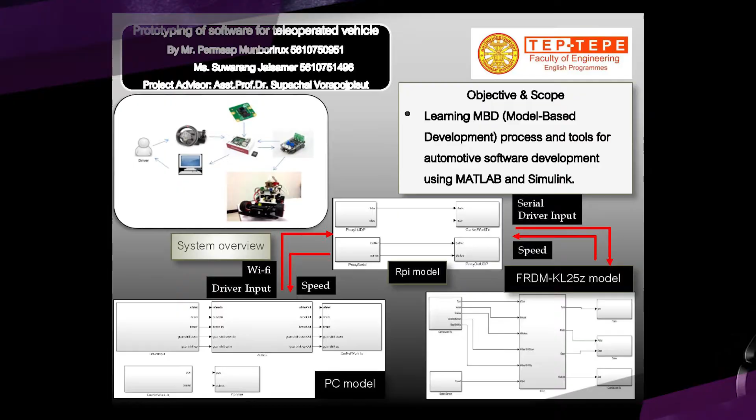This model also sends back the speed of the car to the RPi model, which is later shown on the screen console display. The console display will show the car speed, gear status, and total mile to the driver.

The driver will sit and drive the car remotely, and can see the street through the RPi installed in front of the car, via the screen control.

With higher demand for products by consumers, there will be many more factories being built. Humans play a big role in those factories, and as we know, humans make mistakes. That is exactly what led me to this project.

I will be presenting my project, which I have been creating over the past few months. It's called Pokayoke, or you can call it the Mistake Proofing Processing Unit.

I will break my presentation into three main parts. First, introduction. Second, how does the system operate? And finally, what is my objective for this project?

First of all, what is Pokayoke? Well, Pokayoke is a Japanese term for mistake proofing. Pretty much preventing any mistake that might occur, correcting those mistakes, and allowing the user to notice when those mistakes occur. For example, in an assembly line or production line, mistakes can happen quite normally, since humans must interact with a huge amount of parts and equipment. Those parts and equipment must be installed in order, and therefore mistakes can potentially occur.

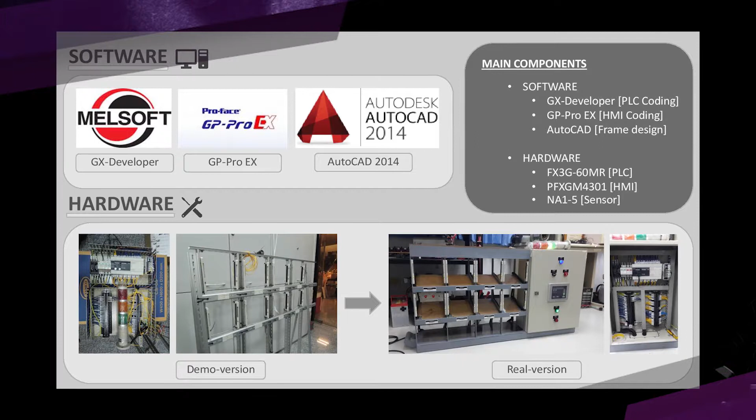So how does the system operate? The system operates by PLC and HMI. This project was specifically designed and developed to run on those two main hardware. PLC stands for Programmable Logic Controller, and HMI, which is Human Machine Interface, and it also includes all the hardware that you actually see in actual operation devices.

So finally, what is my objective for this project? Well, this project is designed to prevent any mistake done by humans in an assembly line or production line, to increase the overall efficiency of the system, and also allow the user to keep track of the progress of their work, even pull out the data, or even be able to customize the machine to fit their specific needs.

And finally, being able to study deeply on PLC and HMI for me, in terms of installation, coding, and operation, is also what I consider to be my objective as well. Thank you.

Okay, so today I will present you my project. It's about the analytical solution of the induction motor transient response. So first of all, I have to tell you about the main aim of this research. This research is aimed at the investigation of the effect of the motor parameters on the dynamic response. So the main objectives of this research are to develop an analytical solution of the electrical torque and current.

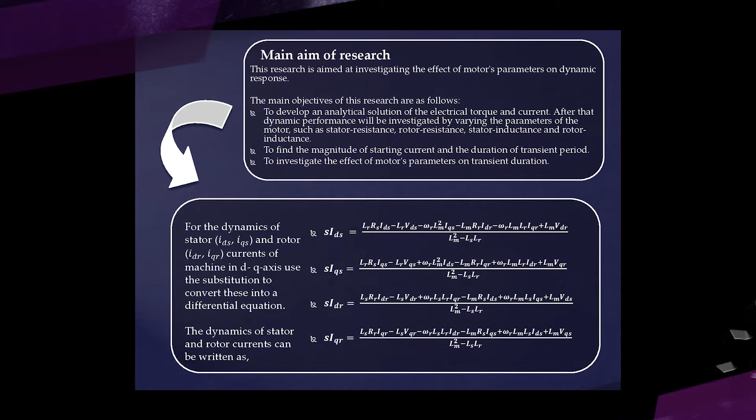After that, the main dynamic performance will be investigated by varying the parameters of the motor, such as the resistance and the inductance. Next is to find the magnitude of the starting current and the duration of the transient period. And the last one is the investigation of the effect of the motor parameters on the transient duration.

Okay, the last one that I will tell you on the main aim of this research is the dynamics of the stator and rotor current of the machine in DQ axis, using substitution to convert that into the differential equation. The equation that you can see on the slide is the equation that I told you about.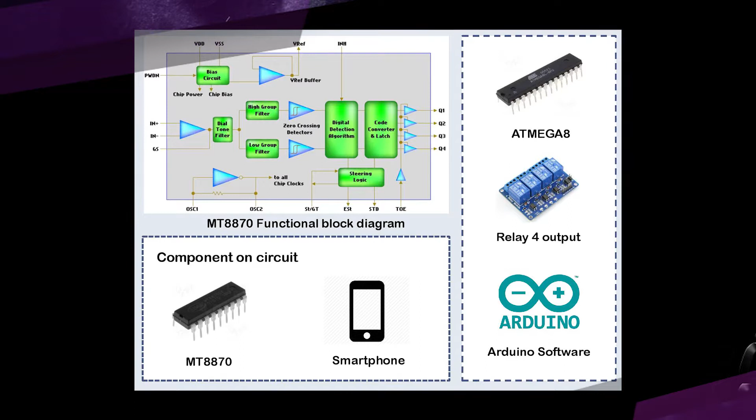Okay, in this part, this is how it works. It consists of two major circuits, which are the control circuit and relay circuit. We have spent a lot of time on the control circuit with two microcontrollers. One of them is the MT8870, which is a decoder. It will receive the signal from our phone, and then send the binary output to the ATmega, which is our controller, to control the output to our relay system. Yeah, and that's it.

Nowadays, industrial companies need to use power units to operate some kinds of equipment. To generate the output power, we need to use the power unit as well.

In this situation, we have to use the power unit to brake something moving, such as a hydraulic system. There are two main types of braking system. The first one is the mechanical braking system. The second one is the electrical braking system.

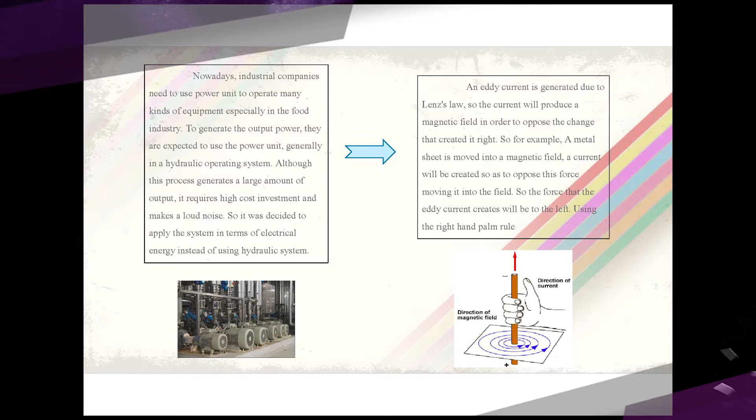Mechanical braking systems are actually needed worldwide, but they sometimes take a high cost investment. So we decided to use an electrical braking system, which is called eddy current. Eddy current is generated due to Lenz's law, so that the current will create the magnetic flux in order to oppose the direction of the driven motor.

So the next part is the procedure of eddy current. I will start with the testing of eddy current. We tested eddy current on a fan motor. First, I will explain the procedure of testing. We take the motor of the fan and we separate the rotor and stator. In the stator, we replace the winding with about 85 turns, and we use the driller to drive the rotor. When we prepare all this, we connect the stator and rotor together and drive it.

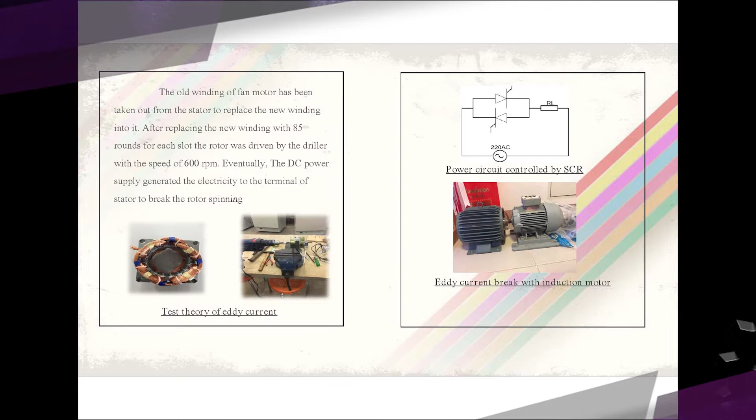The speed of the driller is 600 RPM. When we drive the rotor, my hand is unstable and I cannot control my hand easily. But I can say that the result is a success. Because when we test, when we drive the rotor and we supply the current to the stator, it will generate a magnetic flux and the rotor will move slower. It can be said that it's a success.

So this is the power circuit controlled by SCR, because when we finished the fan motor, we made the real one on an induction motor. We use the SCR and TCA 785. The combination of these we call a full wave rectifier. I separate the induction motor setup into two parts. The first is a normal induction motor and the second is an induction motor which generates the eddy current.

When we want to connect the other induction motor, we need the coupling. The metal that makes the coupling should be a metal that can endure the vibration of the two motors. In the second induction motor, when we supply the current, between stator and rotor it will generate the magnetic flux from the North Pole, passing through the aluminum, eventually to the South Pole. That's where eddy current theory occurs.

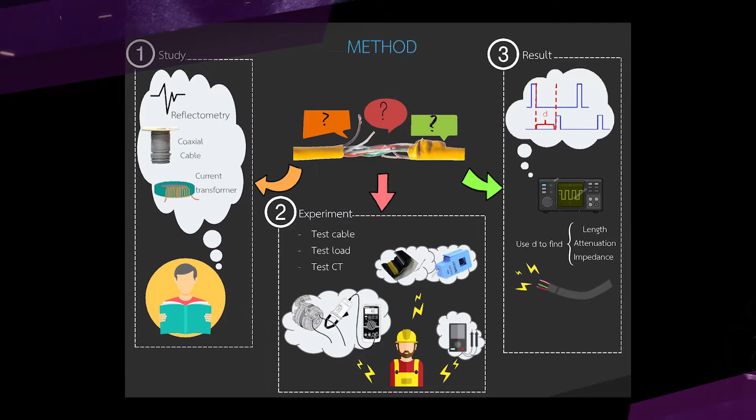Next is the result. The result we got from the last experiment, with the CT, is a graph that combines the injection pulse and the reflection pulse. The reflection pulse will be much smaller than the injection pulse, so we can find the time difference. In this picture, the time difference is D. We can use D to find the length, attenuation, and impedance of the cable. So this is all for our project presentation.

Thank you. Having pets is quite a common thing in Thailand. People usually have pets to take care of their house from intruders and pests like rats and cockroaches.

Pets can be very good friends to humans and can be considered part of the family. Unfortunately, not everyone is available to take care of their pets all the time. There might be some cases where owners need to leave their house for a couple of days and cannot ask someone to help feed their pets.

And leaving a lot of food all at once is not a good option because some owners need to take care of their pet's diet, and leaving a lot of food all at once can also lure pests, which creates health risks for both pets and humans. So to solve this problem, this project came up with an automatic pet food dispenser.

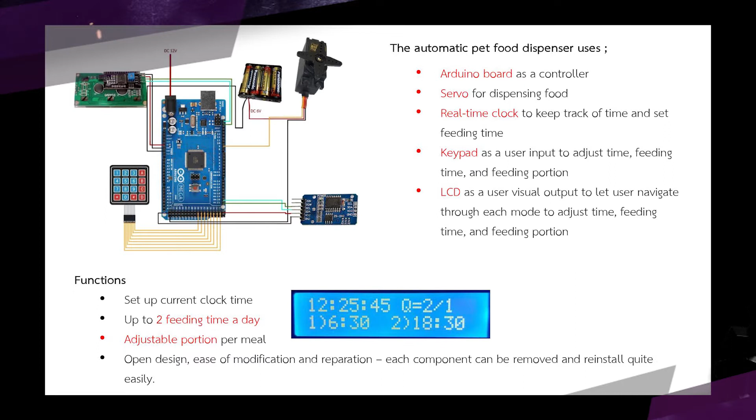So the type of dispenser that is created in this project is based on the tower type in the market right now. So the basic of this tower is the top part is the food container, which will gravity feed the food down to the propeller in the middle, and when the feeding time is reached, the controller will order the servo to rotate and dispense food to the bottom part of the tower, which is the food tray.

And the components that are used in this project are, first, an Arduino board, which is used as a controller. Second, a servo, which is used as a rotating mechanism to dispense food. Third, a real-time clock, which is used as an integrated clock to keep track of time and set up feeding times. Fourth, a keypad, which is used as user input. And fifth, an LCD screen, which is used as a visual output to navigate the user through each mode.

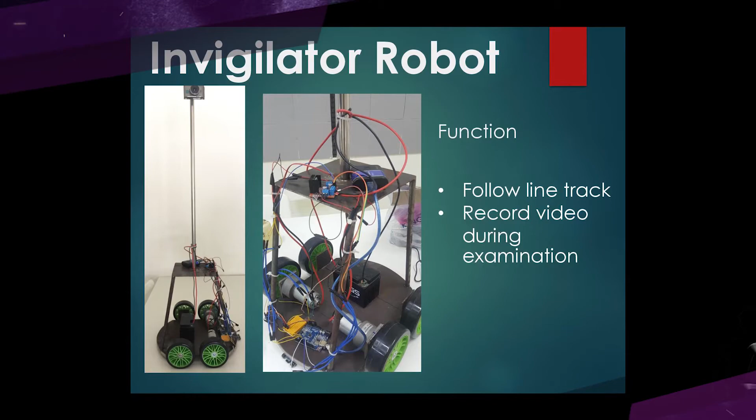Okay, for the design of our robot, it will have 4 wheels, 1 battery, 2 motors, and a control system. In our control system, we use an L298N to control the power supply to the motors, and we can control the direction and the speed of the motors. And then we have a line tracking sensor to sense the line for the robot to follow the way we have decided to go. So we will have a sensor over here at the bottom of the robot, and the control system to control the speed and direction of the robot. And we use a battery as our power supply.

And for how the robot will move, we will put the two motors on the front wheels. If there is a straight line for the robot to go, it will just move forward with both the left and right wheels. But if it needs to turn left to follow the line, the left wheel will turn in the other direction, and the right wheel will turn in the same direction for it to turn over the curve.

This project is about an automatic solar panel cleaning machine. Many people today use manual cleaning methods to clean their solar panels. So this project is about a new design of cleaning machine to clean solar panels, make it better than the manual cleaning method, reduce problems from manual cleaning, and clean better than the manual method.

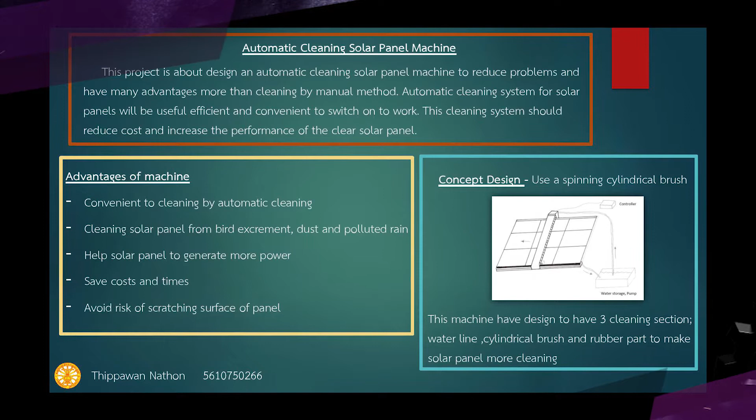There are many advantages for this project, like convenience by using a control switch in an automatic system, and it can clean the solar panel from dirt, bird excrement, and also polluted rain, avoiding risk from accidents and scratching the glass of the panel, and saving cost in maintenance crew and time.

There are three main processes for this concept of design. The first one is the water line to release the water to the panel, then the cylindrical brush to clean the surface of the panel, and the last one is the rubber sheet to make it cleaner.

The working process for this machine: first, just turn on the switch of the machine and the water pump to make it run, and control the machine by the switch, and it can also stop by using the switch control.

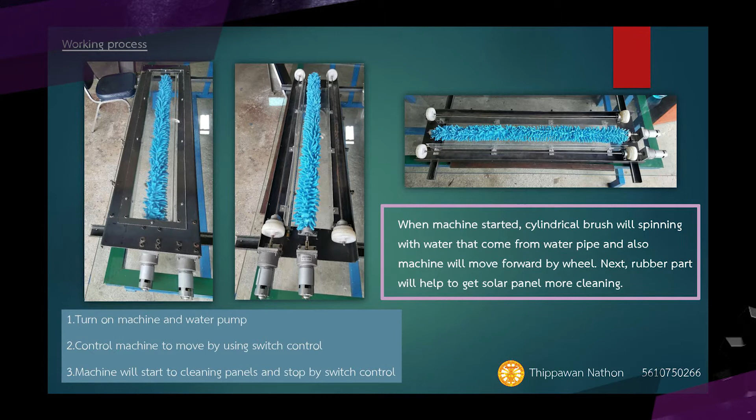Starting the machine, when you turn on the machine it will start to clean by wheel, and the cylindrical part will spin to clean the surface, and then the water line from the machine will release the water, so it will mix with the spinning. The last part is the rubber sheet to get the solar panel cleaner with clear water from the cylindrical part.

Nowadays, technology has significantly impacted the globe, obviously in terms of convenience, speed, and time saving, which helps modern people have more flexibility. Thus, we can see that the trend of smartphones in Thailand is very popular because there are a variety of applications that make people work easily and get closer because they can communicate through social media applications.

As we realize, agriculture is well known as a signature and foundation of Thailand because we have a lot of farming here. Hence, this is the reason why this project was created by applying and adapting technology to agriculture in order to help Thai farmers water plants from anywhere through a mobile application.

Let's talk about the objectives. First one, to design a mobile controlled plant watering system that provides convenience to the plant owner, uses water efficiently, and can be upscaled. The other one is to build a small prototype of the system. Let's see how it works.

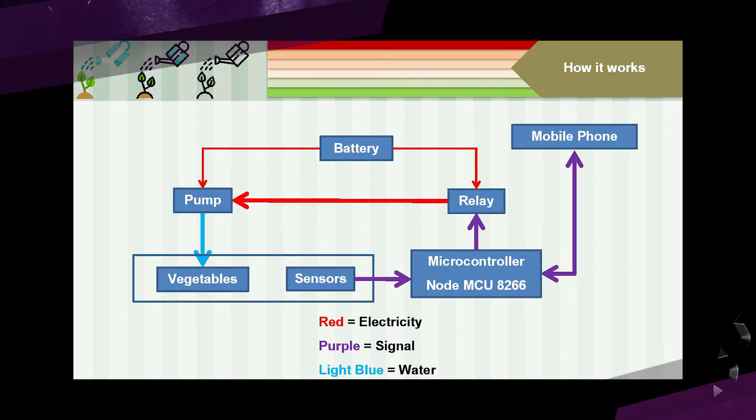Initially, the sensor sends the signal to the ESP8266 in order to display the data on the smartphone through Wi-Fi. Second, when a user clicks on, the command will be sent back to the ESP8266 again, and then a relay will be activated to supply electricity for a pump which irrigates plants.

Today I'm going to present my senior project named Robot Face with Autism. Why do we do this project? First, children with autism have a problem with social skill interaction. They are unable to recognize other people's emotions and they are unable to express their own emotions. Our robot face will help them to be able to recognize other people's emotions and also to be able to express their own emotions.

Then the therapist will teach the autistic children to be able to recognize the emotion of this robot face and let the autistic children express the emotion following this robot face. And lastly, we are going to test the autistic children by giving them pictures of people with various kinds of emotions and let them match which picture expresses the same emotion as the robot face.

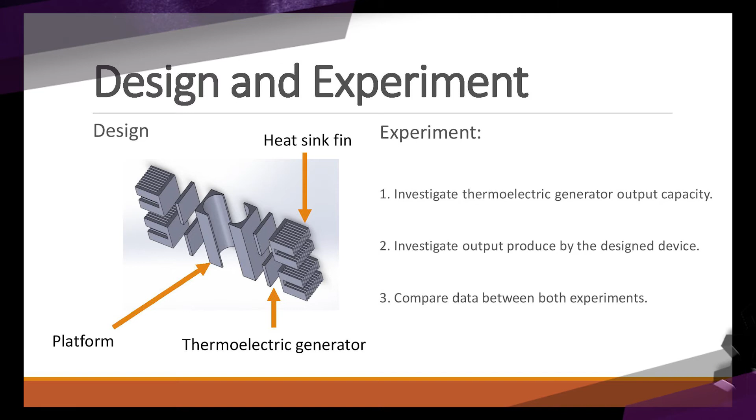Now that gives way to the second experiment, which is to install this whole assembly onto a real motorcycle and test drive it. The motorcycle is driven at 3 different speeds, and we record the data obtained from each speed. The result we obtained was that the power output was not enough to supply general electrical devices. Therefore, in conclusion, we have to further investigate and redesign this device in order for it to be more efficient.

According to the 2014 report on Bangkok traffic control, the number of cars purchased per year has been on an increasing trend since 2008. Now, the number of parking spaces is still limited. This means that most cars are parked out in the open, directly or partially exposed to the sun's UV rays and the harsh atmospheric conditions of Bangkok. This may be problematic since UV rays can directly cause permanent paint wear. Now, all of this can be prevented.

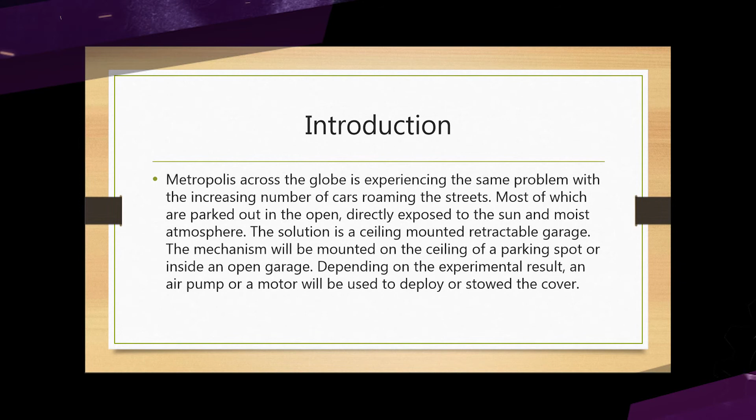The aim of this project is to design a mechanism that helps prevent the threats mentioned earlier. The mechanism is a retractable mounted garage. It can be installed onto any kind of house design that has an open space. The prominent point of this design is that it does not require electricity to operate, and it automatically operates with the help of hydraulics and the concept of mechanical advantage.

By not using electricity, this design saves cost. It is much cheaper than using electrical motors to operate. And also, it is much more stable. By stable, I mean it can still operate in case of a power blackout, which always happens in Thailand.

As we know, Thailand is an agricultural country, so to keep products long-lasting, the hot air drying method is widely used to remove moisture. However, energy consumption and drying period are quite large. This research utilizes a high voltage electric field in cooperation with the hot air drying method to improve the drying rate, which is called electrohydrodynamic wind.

For the principal concept of improving hot air drying efficiency, electrohydrodynamics is when high electric voltage is applied and flow charge is induced to free air to circulate. Due to the effect of circulating wind, moisture on the material surface moves much more to the hot air flow, and heat can transfer much more from hot air to the material. Consequently, the rate of moisture removal and heat transfer are enhanced.

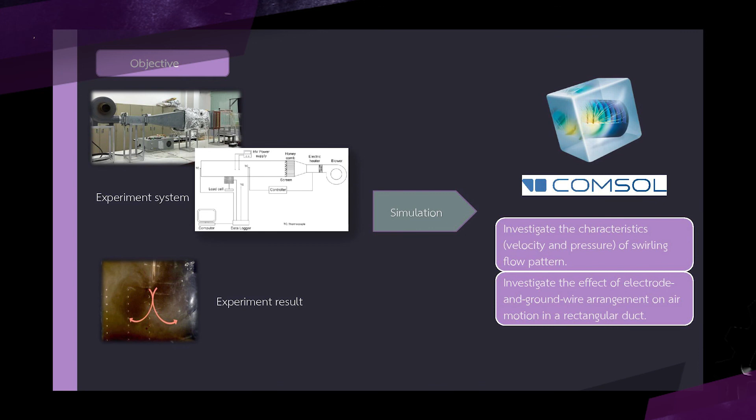The objective of the research is to numerically investigate the pattern of airflow manipulated by the electric field, relying on electrode and ground wire arrangement, with the COMSOL Multiphysics system. By simulating the system from the practical experiment, this research considers the characteristics, which are velocity and pressure of the swirling flow pattern, and the effect of electrode and ground wire arrangement on air motion.

The design challenge is to make the wheelchair in a compact form. It also has to meet the challenge of being available for the patient to operate on a daily basis, and it must be light so that it is portable for the patients to carry.